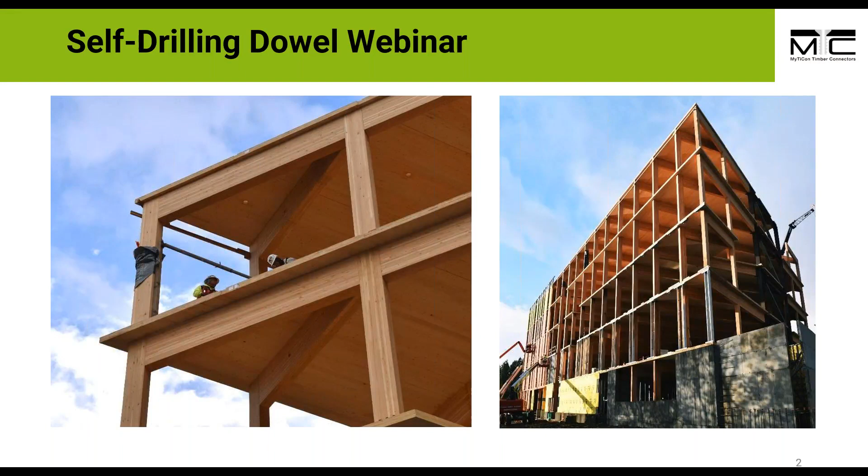Hi everyone, welcome to the Self-Drilling Dowel webinar. Self-tapping screws have revolutionized the mass timber world, enabling bigger buildings and more complex structures. However, one of the governing design parameters is still the fire rating of the structure, leading to the popularity of concealed connection systems. Wouldn't it be nice for designers working in mass timber to have access to a fastener engineered for internal knife plate connections? We think so, and that's what I'll present today.

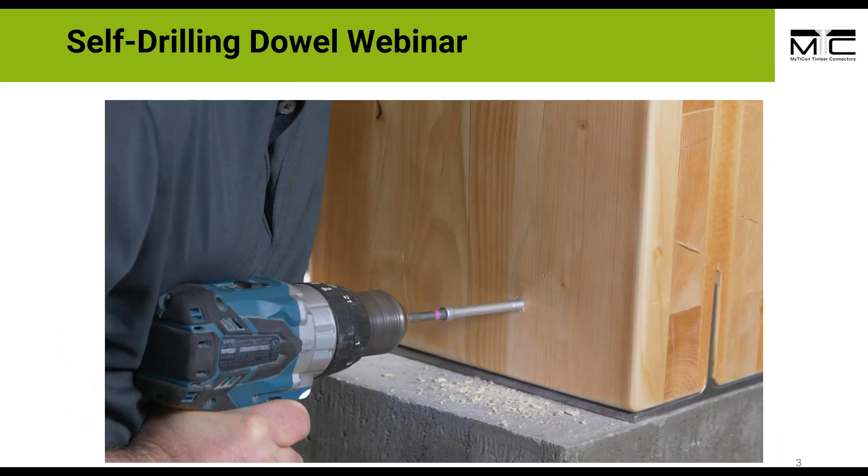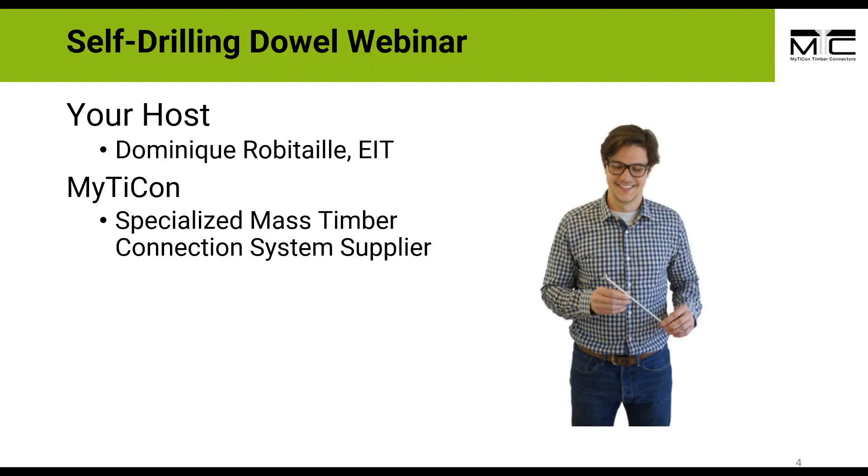Hi, my name is Dominique Robitaille. I will be your host today. I'm a technical support engineer at MyTiCon, a specialized mass timber connection system supplier. Today we'll go over three major questions: What is the self-drilling dowel? Why use it? And how to use it.

To answer our first question, we'll go over a simple product presentation. We'll go over the self-drilling tip, the continuous thread, the concealable head, and the hardened steel, and I'll explain why these features will help you design a connection that's easier to detail and to install.

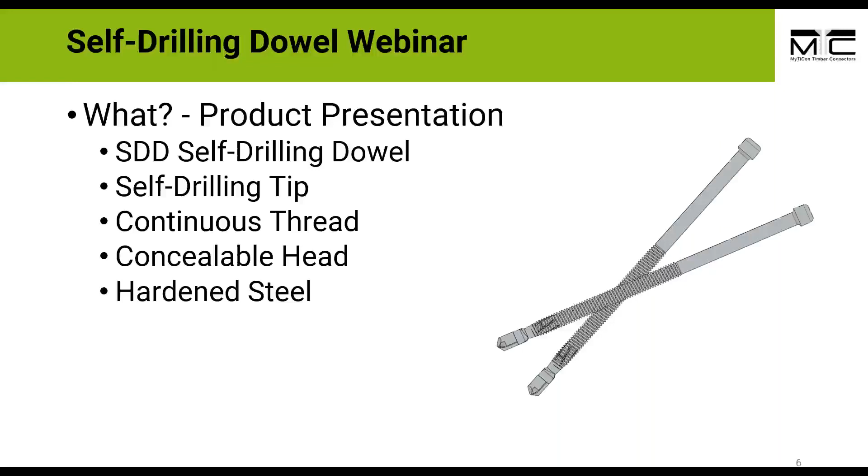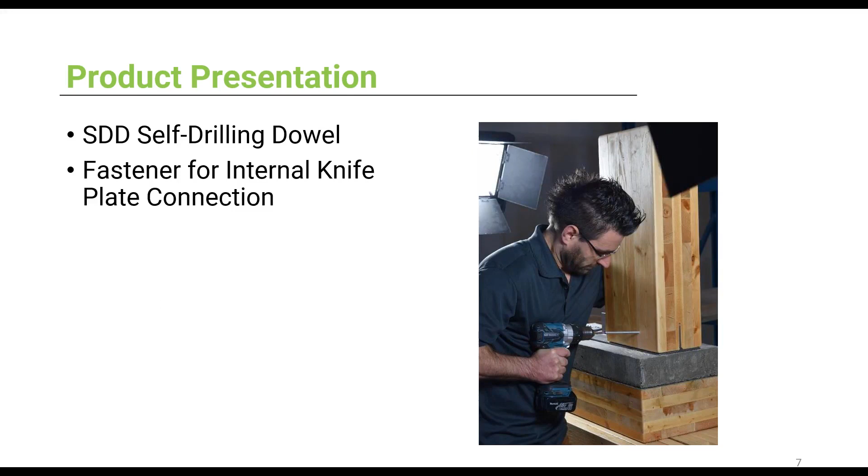What is the SDD? It's a self-drilling dowel designed to hold internal knife plate in mass timber connections that can easily be installed with a cordless drill. Here we have Max, my boss, installing the SDD for our installation video. This is mostly to show that we would never sell a product that we cannot install ourselves, and we cannot expect the contractor to install something we cannot. I'll show you the video a bit later.

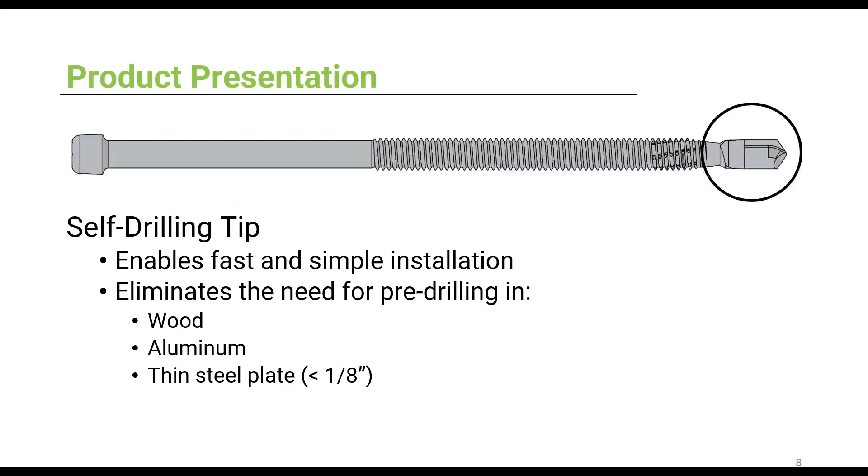Let's begin with our first feature, the self-drilling tip. It enables fast and simple installation and eliminates the need for pre-drilling in wood, aluminum, and thin steel plate. By thin steel plate we mean thinner than 1/8 of an inch.

Second feature, the continuous thread, which helps avoid slippage of the dowel. Once the dowel is installed, the thread maintains it in place and helps drive the dowel in. It also allows installation with a cordless drill because of the low installation torque.

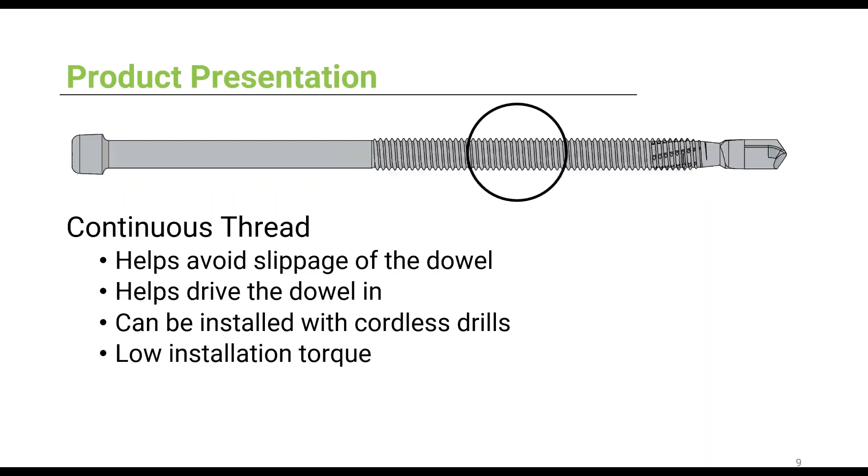Finally, we have the concealable head designed to be used with AW40 bits. One of the most important features is the hardened steel. The whole dowel is made of the same steel, which reduces the risk of the head falling off. The hardened steel gives the dowel high design strength, exhibiting stiff behavior, and we have a surface coating for corrosion protection on top.

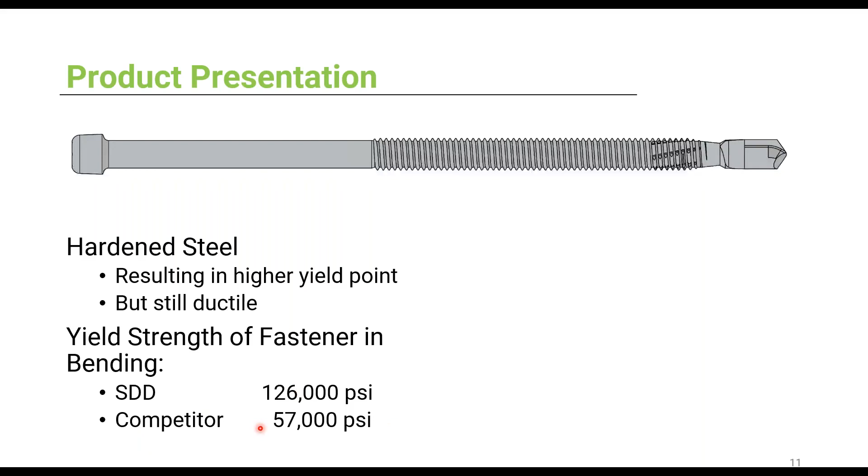We can compare the bending yield strength of the fastener to a similar product on the market, and we can see that the bending yield strength of the SDD is twice the strength of similar products. So to recap: what is the SDD? It's a fastener designed to hold internal knife plate in timber connections that can be installed with a cordless drill because of the self-drilling tip, the continuous thread, the concealable head, and it's made of hardened steel.

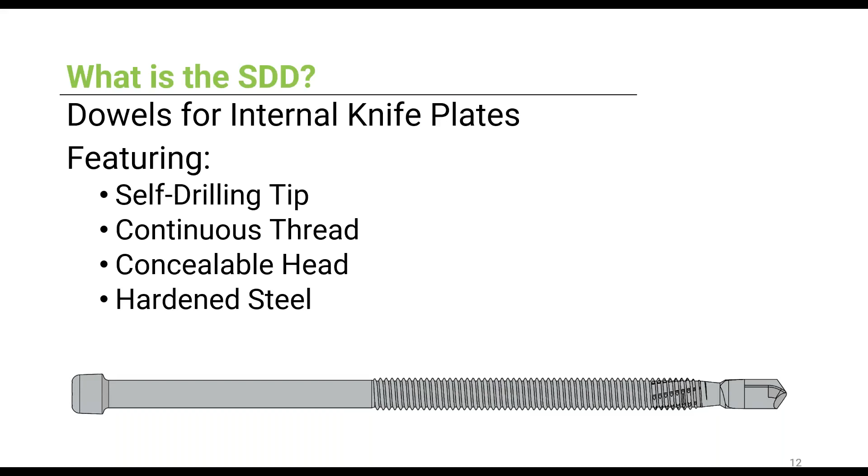Next question: why use this dowel, other than the high bending yield strength? Because they allow for simple installation of concealed connections, but also because they are adaptable, they are tested, and that's what we'll explore now in this section.

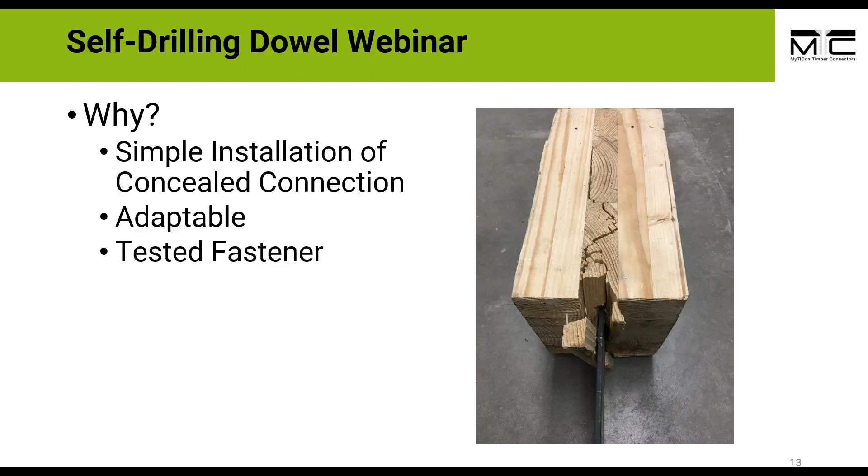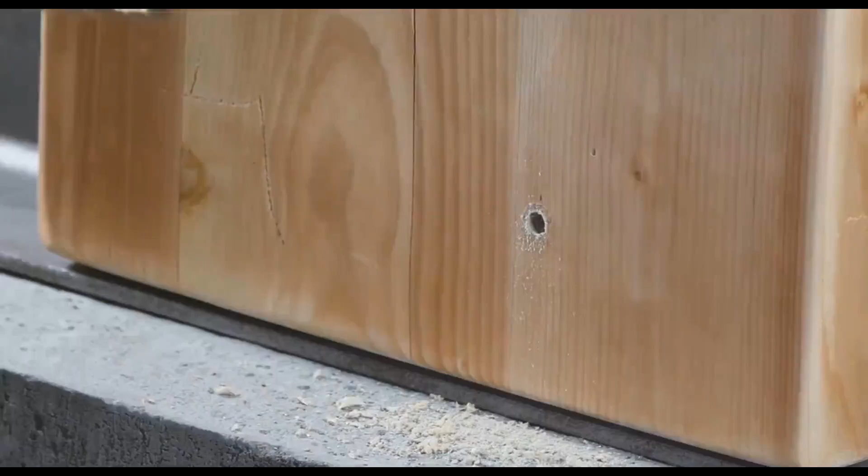To demonstrate the simplicity of the installation, I'll show you part of our brand new installation video. As you can see, we start by pre-drilling with a 1/4 inch drill bit, and we pre-drill all the way through to the steel plate, and then we can simply install the dowel in.

You'll see there's a bit of a bump once Max hits the steel plate, but the installation is still fluid and rapid. You can see the bump right here. But as you can see, it goes in pretty quickly still, even though we haven't pre-drilled all the way through to the other side of the CLT.

And if you want a fully concealed fire-rated connection, you add a wood plug to cover your dowels once they're fully countersunk. So we'll go into a bit more detail on how the features make for a simple installation.

So first, here we have the pre-drilling. The red part here represents the pre-drilling. The drill tip eases the entry, and then the thread helps the forward movement. Then the thread grips onto the steel plate and guides the dowel through it. Finally, the tip finishes the drilling, and the thread maintains the dowel in place.

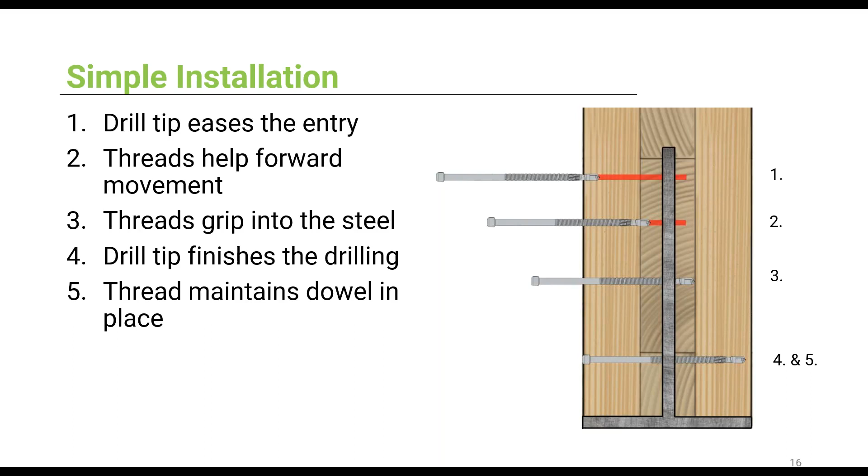So we can compare the simple installation of the SDD with a half-inch steel dowel. For a regular half-inch steel dowel, you'll need to use a hammer and a lot of on-site work, which leads to higher risk of splitting the wood. On the other hand, our SDD allows for more shrinkage and swelling of the wood because they can bend a bit more. They also allow for better stress distribution and better load dissipation.

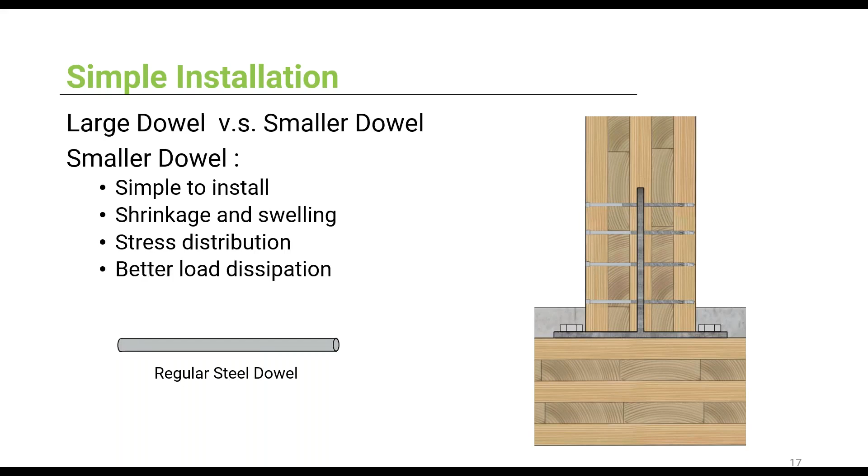As I mentioned earlier, if you want a fully concealed fire-rated connection, you can countersink your dowels and cover the hole with a wood plug.

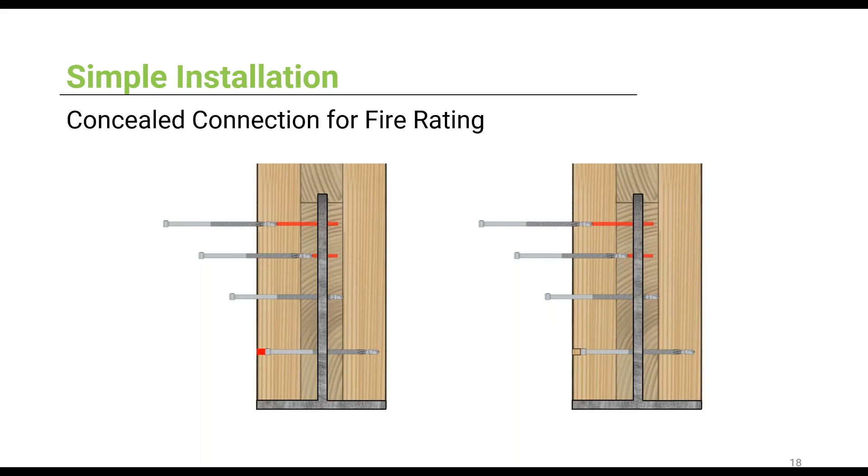So first tip for my tip section will answer the question: should you pre-drill on-site or not? Pre-drilling off-site can seem more efficient, but it may lead to more labor-intensive on-site work, as it can be hard to align the hole in your wood member with the ones on your steel plate.

So our suggestion is to use pilot holes, so you don't need to measure edge distance on your wood member on site. But once you're on site, you can use the pilot holes as a guide to drill into the steel plate and then install your dowels. So our solution to whether you should pre-drill on site or not is pilot holes.

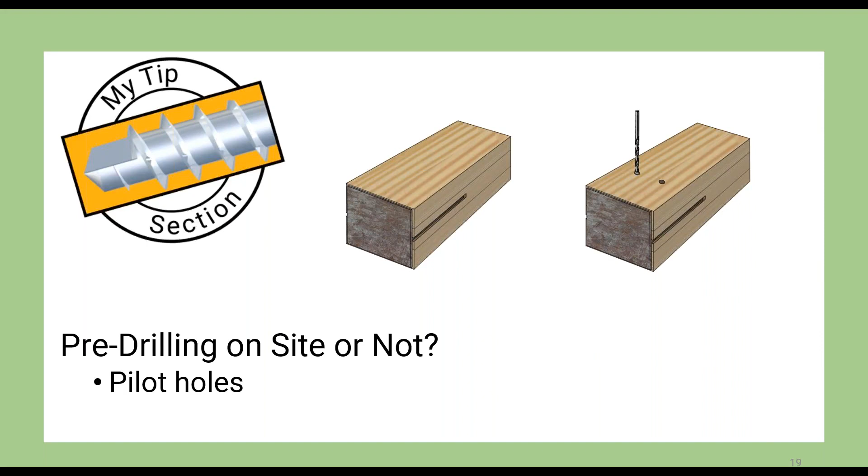In the following slide, I'll present visually appealing concealed connections. To do that, we'll go over the most common framing systems, and I'll show where the SDD could be used. We'll go over examples in platform framing, balloon framing, and post and beam framing.

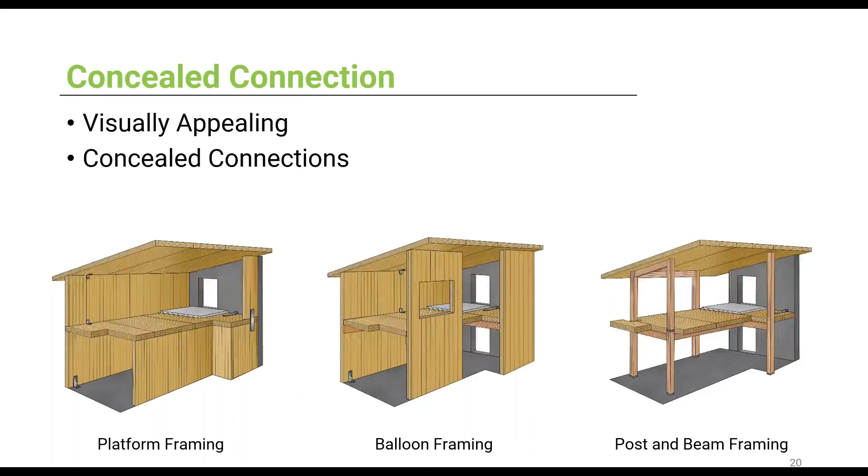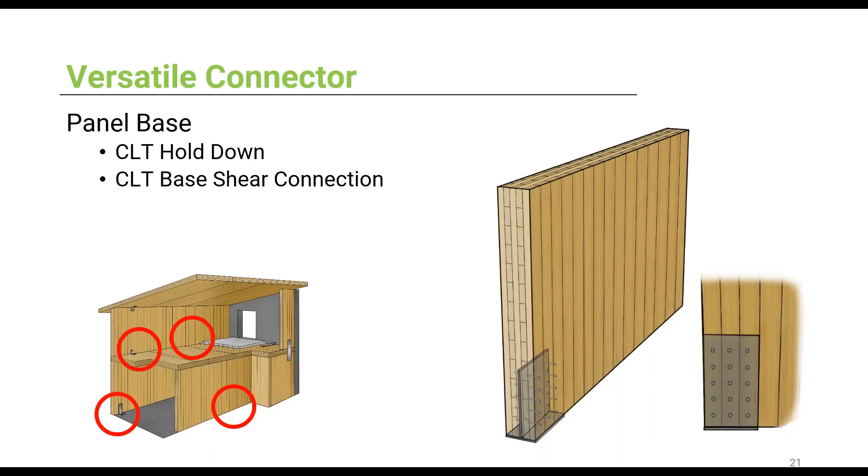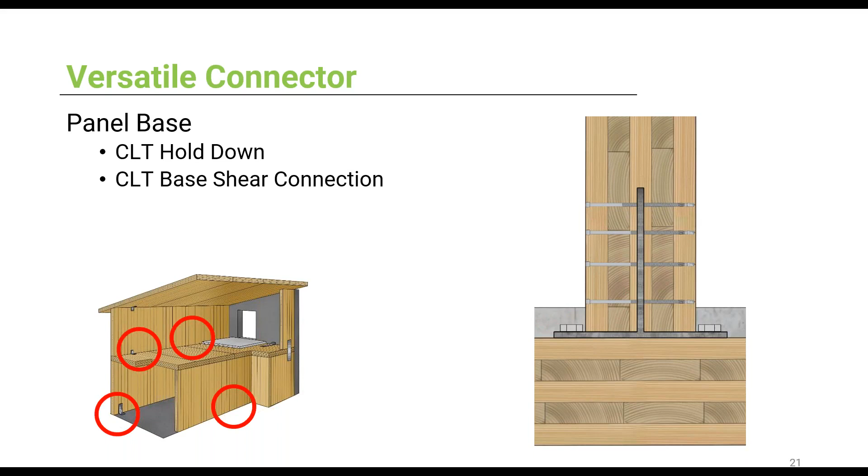So our first example looks at panel base connections, where we have CLT hold downs and CLT base shear connections. For the CLT hold down, we can replace the angle bracket with something like this, and we can replace the base shear here with something like this, where you can see the concrete topping conceals your steel plate completely. This could be done in platform framing or balloon framing.

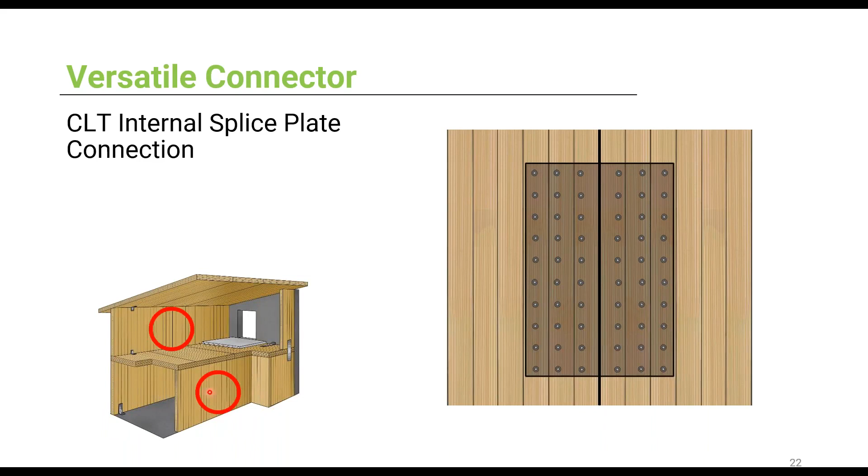For the second or third example, the SDD could be used in internal splice plate connections, again in platform framing and balloon framing. So you can have a completely concealed internal splice plate connection here.

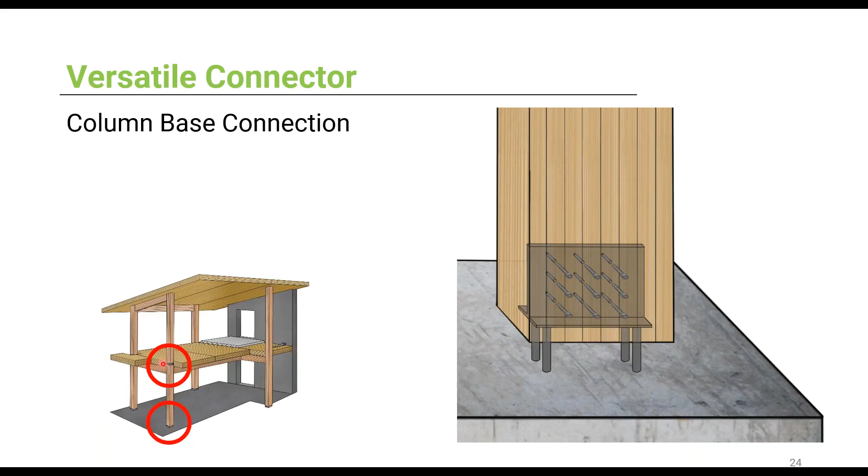Another option is knife plate hangers that could be used all over your structure for a post and beam framing system. And another example of why these fasteners are adaptable is moment connections.

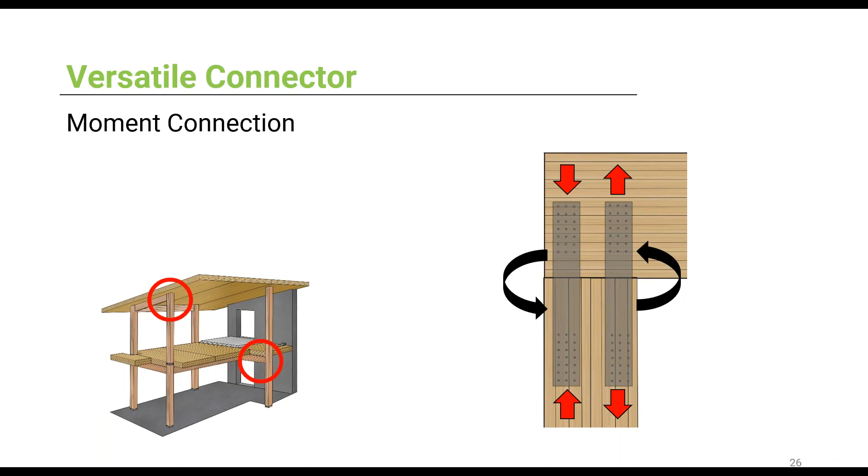On this type of connection, it's important to make sure that the dowels are installed symmetrically around the centroid of the connection, so the load is spread properly.

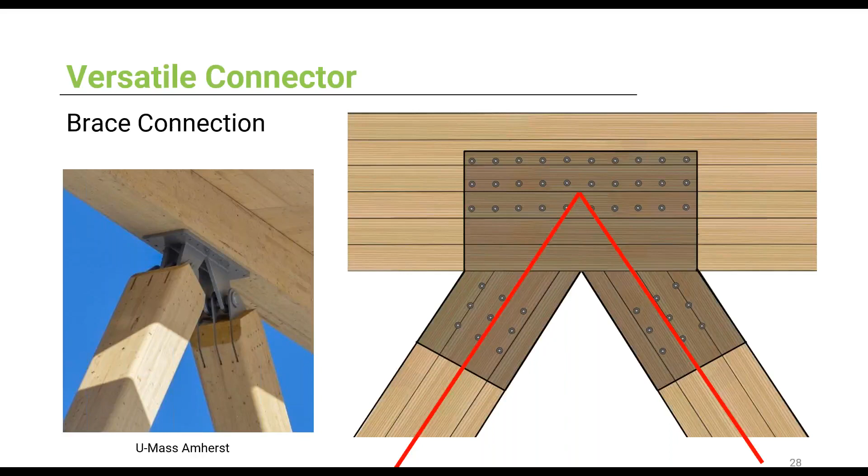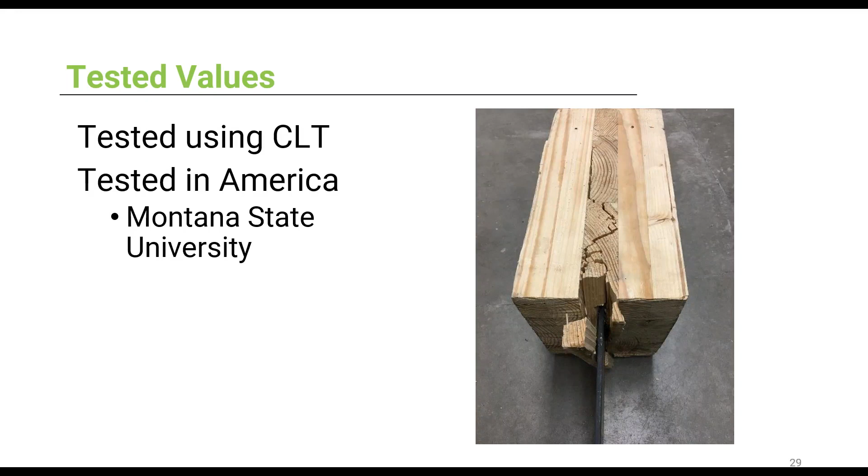Another reason to use these dowels is because they are tested. They were tested using CLT, and specifically tested in America at Montana State University.

I've previously talked about fire rating. To get the proper fire rating, you can use the same concept as for our beam hangers, which is to protect the steel with wood.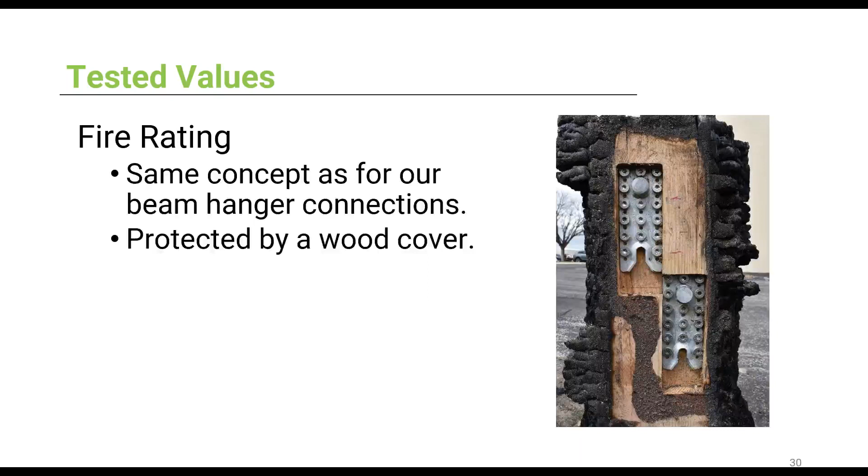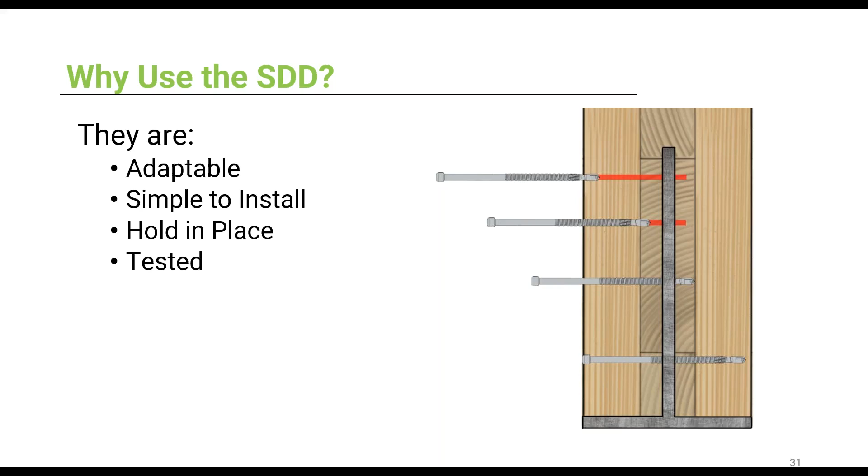So, conclusion: to have a fire-rated connection, you need to completely conceal your dowels and your steel plate. If you want to conceal your dowels, we suggest using wood plugs, like this example. To recap, why use these self-drilling dowels? Because they are adaptable, simple to install, they hold in place, and they are tested.

Final section: how to design with these dowels. We'll go over a few important details to remember, then the design guide, the geometry requirements, and the bending yield strength.

First important detail: to determine the depth of your plate, you need to talk with your wood material supplier to make sure you can route a long enough slot into your plate. On the left we have an example of a 23-inch blade, and a CLT panel on the right. But because of how the saw is designed, you can only get a 6-inch slot into your CLT, even with a 23-inch blade. That's something you need to discuss with your wood provider to ensure the right slot in your CLT panel.

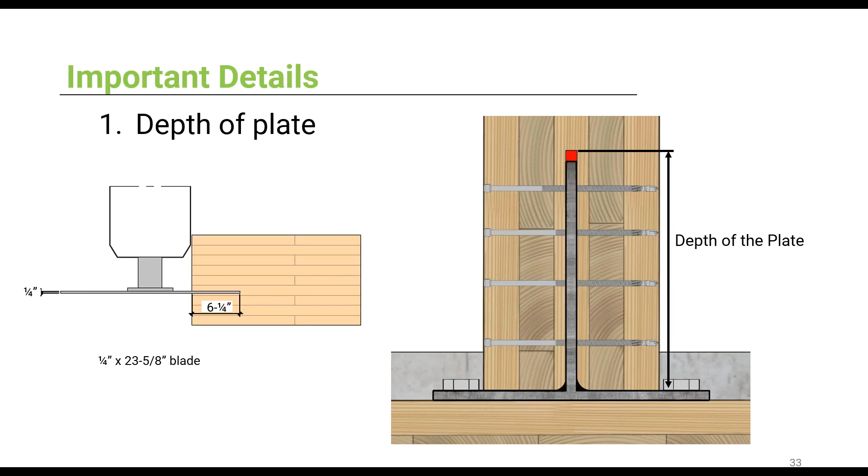Another important detail is to reserve extra space on top of your connection, because under compression, the knife blade may act like an axe on your wood member and simply split it in two -- something you definitely want to avoid. Make sure you keep half an inch here to account for the compression on your connection.

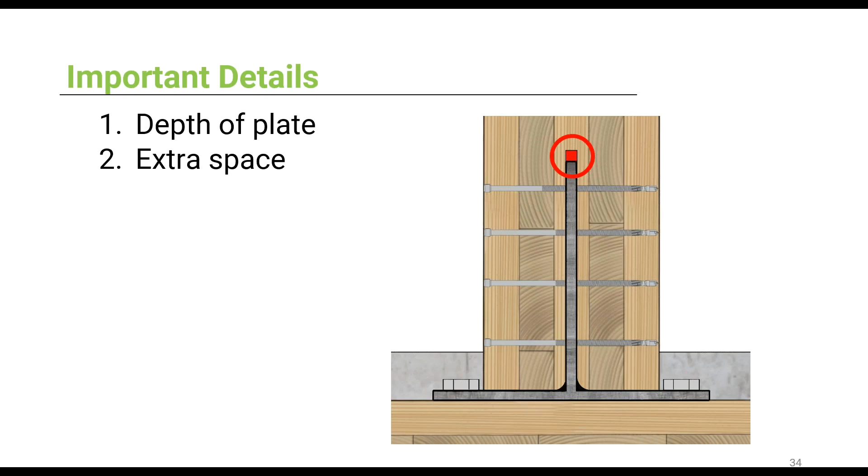Third important detail: check if your steel plate has rounded corners, like a hot-rolled T-section, or welded corners. In both cases, you need to bevel the corner of your wood member to make sure it fits perfectly on your steel plate.

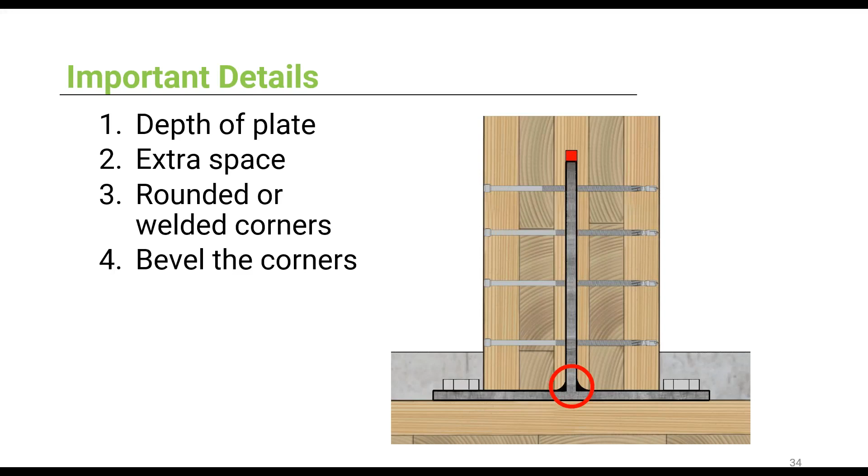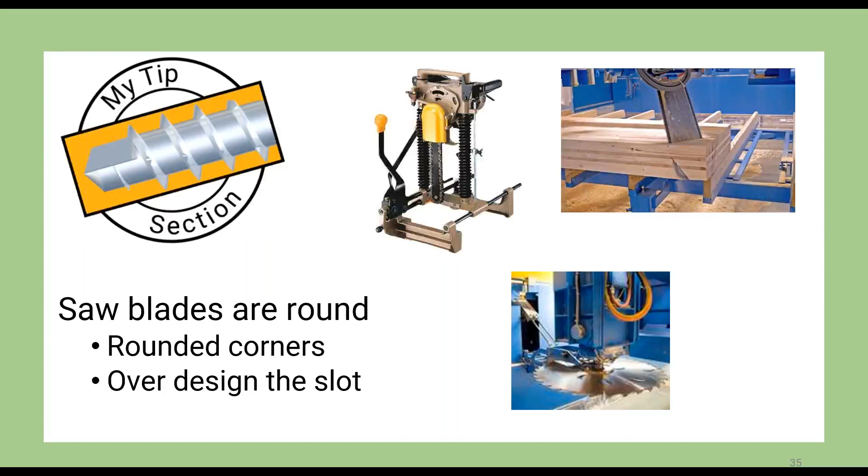Another detail to remember is that saw blades are round. This might sound funny, but it's a comment we often get from installers -- the steel plate has squared corners while the slot has rounded corners, so the plate doesn't fit. So either design the plate with rounded corners, like here, or over-design the slot to account for the curvature radius of your blade.

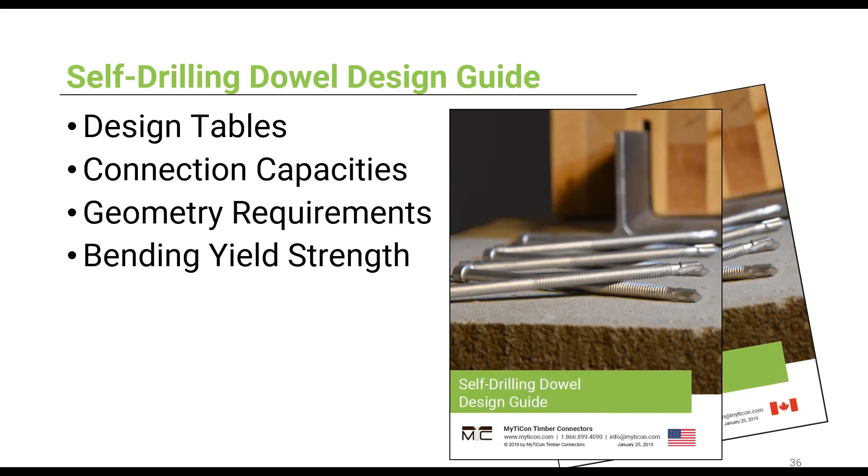We'll now go over the design guide, using the Canadian and American versions at the same time, with a simple column-base connection as an example.

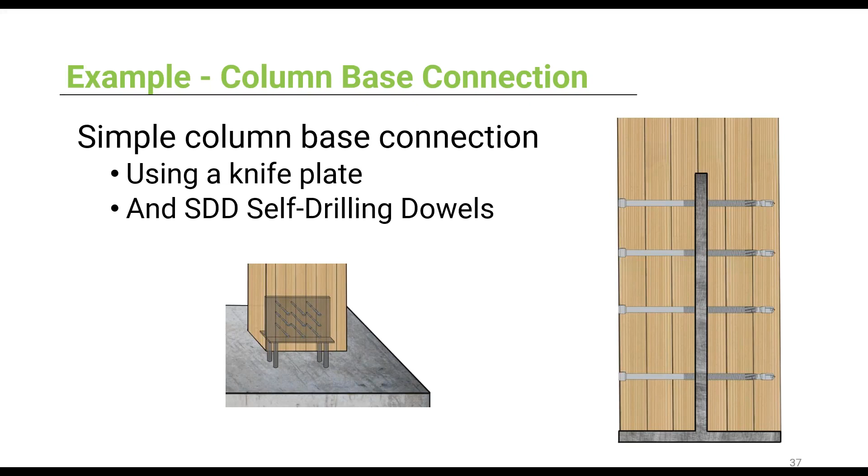The connection is going to use a single knife blade and 4 self-drilling dowels.

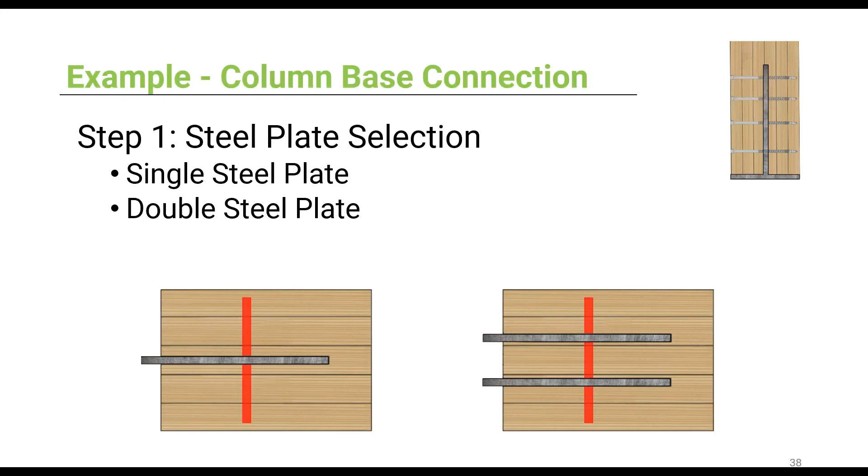First step: decide how many steel plates you should use. The choice depends on the thickness of your wood member -- with thicker members and heavier loads, use a double knife blade connection. In our guide we suggest a 1/4-inch steel plate, though aluminum plates could also be used. For our example, we'll select a single knife blade connection.

Step 2: select the length of the dowel you want to use, which also depends on panel thickness. We have 9 different lengths available, from 3 inches to 9 inches, all with the same diameter of 1/4 inch.

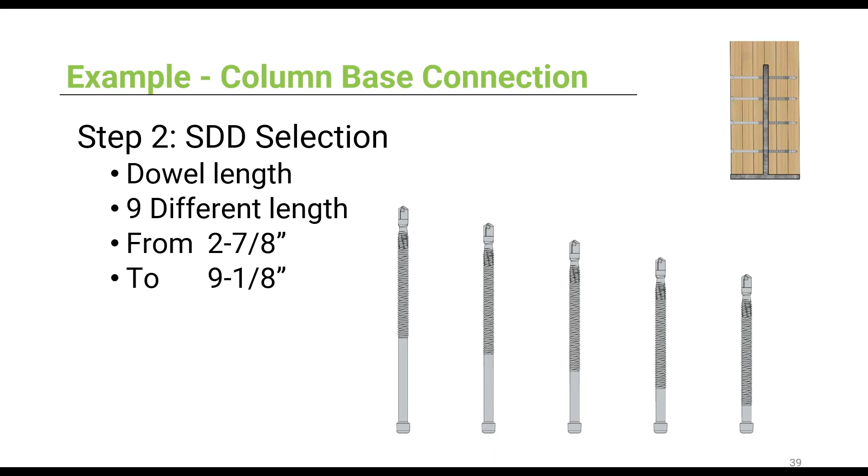So here we have the graphic of the design value of the dowel and the length of the dowel. Because of how the yield equations are calculated, the design value increases with the dowel length, and then it plateaus.

This example is for a single knife blade connection, but the concept is similar for a double knife blade connection. The second knife blade creates an additional shear plane, increasing the resistance of the dowel. This is why for bigger connections you should use a double steel plate connection, where the plateau is a lot higher in this graph.

So in our example, we decided to use a single knife blade. Let's choose a 5 1/4 inch dowel, which would be right before the plateau. That's what you always try to optimize.

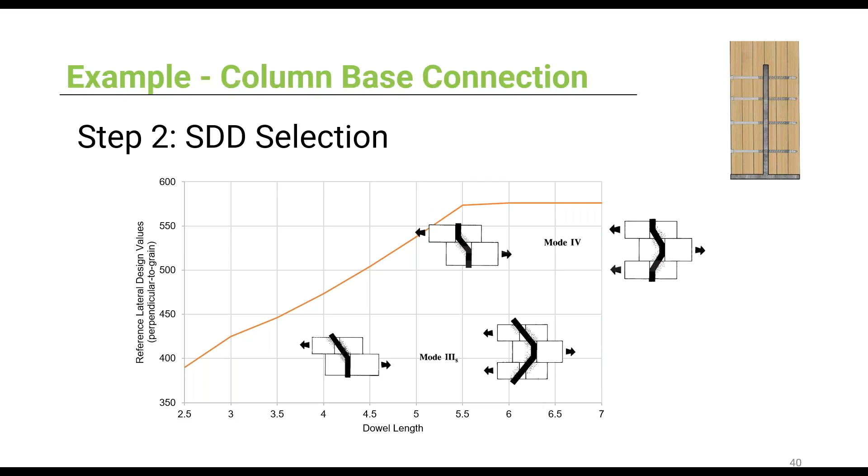Step 3, evaluating the design value. But before you do that, you need to make sure the embedment is checked. Before evaluating how strong your connection is, you need to make sure there's enough embedment on both sides of your steel plate, and in between as well.

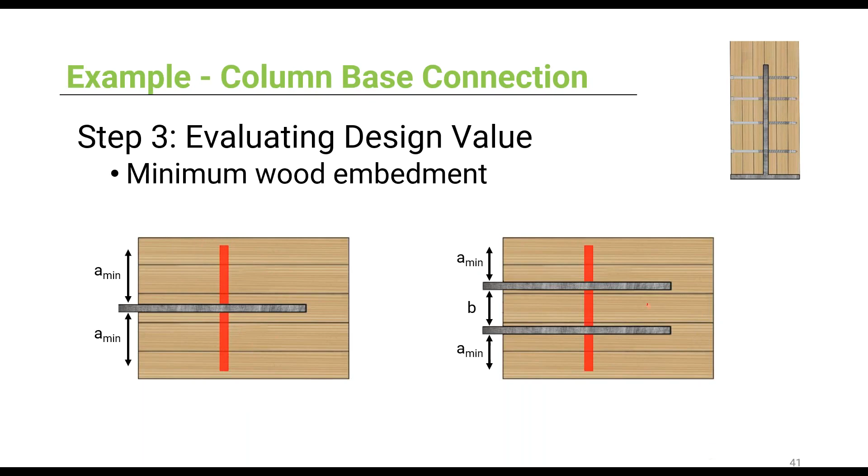This is shown in our design tables, which leads me to another tip: selecting the optimal spacing in a connection with 2 knife blades. To do that, you want to make sure that T1A is equal to T1B, so the spacing on the exterior of your connection is the same as the spacing in between your 2 knife blades.

The NDS doesn't provide clear guidance on that, especially on double knife blades, so we use guidance from the CSA, the Canadian version of the NDS.

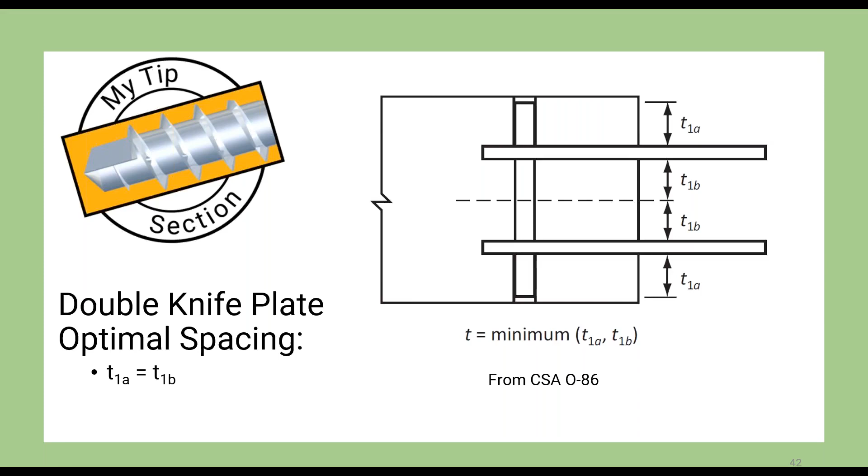Now let's assume that for our example, the embedment length is respected. Now we can use the design table to evaluate the design value of our dowels. We used a 5 1/4 inch dowel, so we have 3 values here.

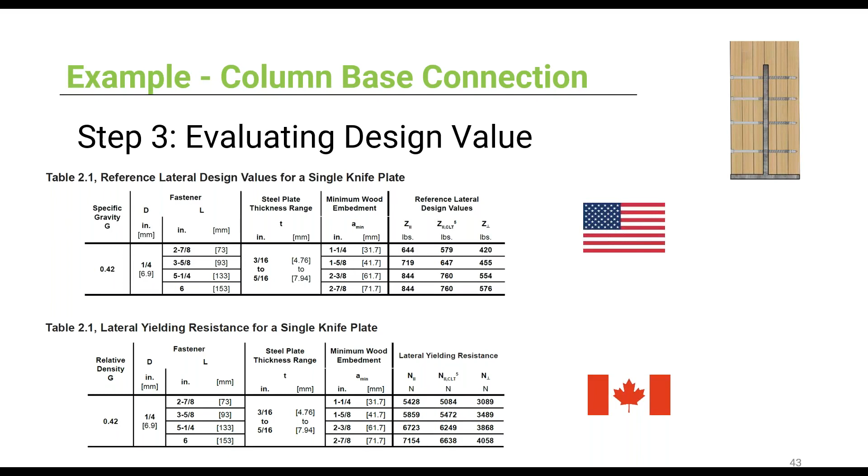These 3 values depend on the load direction at the shear plane, and we'll go into a bit more detail. First case is parallel to the grain loading. Then we have parallel to the grain loading in CLT. And third, we have perpendicular to the grain loading in CLT and in timber.

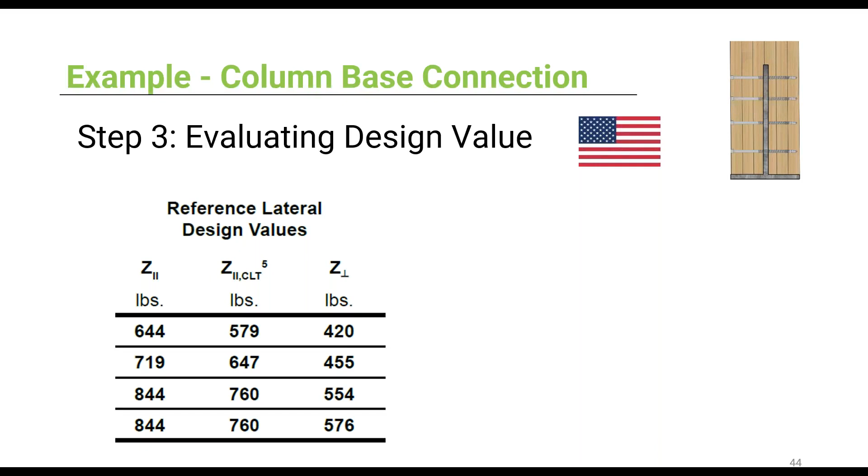With a connection in CLT with 2 knife plates, it may be difficult to determine how the load is applied. Here we have an example where there could be perpendicular to grain loading on one side of the steel plate and parallel to grain loading on the other side. If such a case occurs, we suggest using the most conservative value, so the perpendicular to grain loading, this one here.

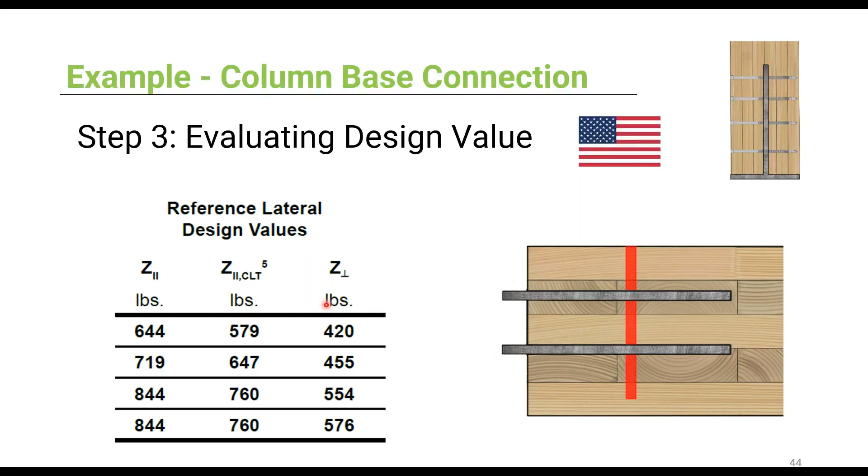Step 4, we need to adjust the design value. We have two adjustment factors. In the US, we have the NF factor and the C factor, and in Canada, we have the NF factor again and the K factor.

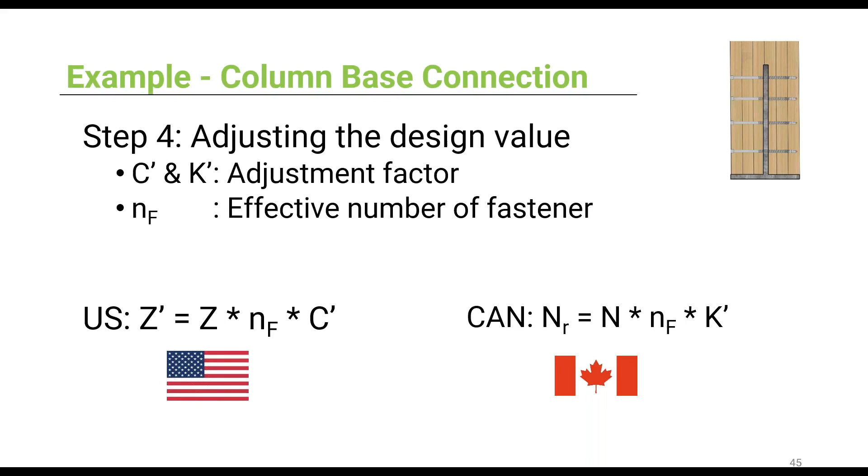The C and K adjustment factors are for service conditions, so dry or wet, the duration, and other factors. The NF factor is for the effective number of dowels needed. This accounts for the number of dowels, but also for the group effect.

So as I mentioned, NF is the number of effective fasteners acting in a connection together, and it depends on N, the total number of fasteners acting in the connection. In our example, we said we are using 4 dowels, so our effective number of dowels would be 3.6, using the 0.9 reduction factor we have here.

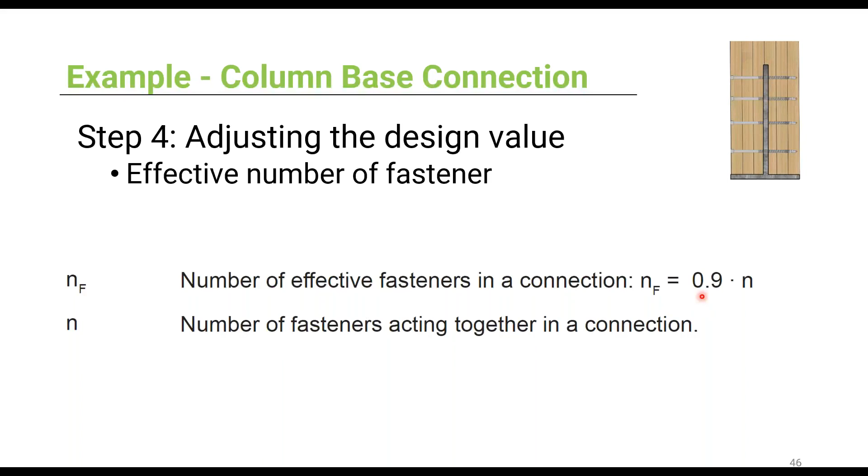Finally, step 5, we need to make sure that the geometry requirements are respected. The design guide provides values for timber, glulam, and CLT.

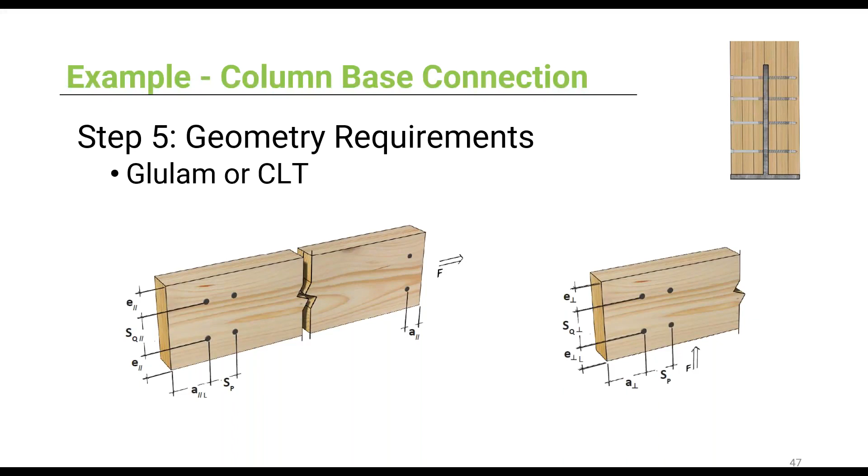If you want to design a connection that's outside the scope of our design guide, with an aluminum plate for example, or a thicker plate, or really thin plates, we provide the strength in shear and the bending yield strength of the fastener, so you can use these values for your own design.

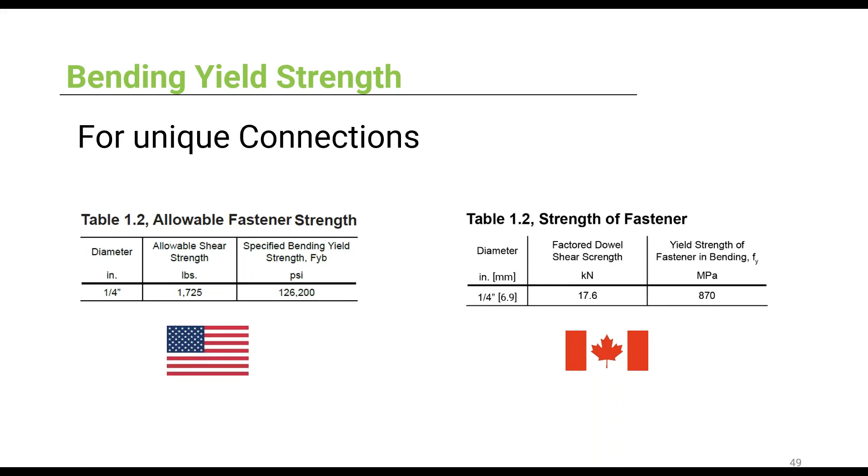To recap this section: how to design with the SDD is by using the self-drilling dowel design guide, and by making sure not to forget the important detail mentioned earlier.

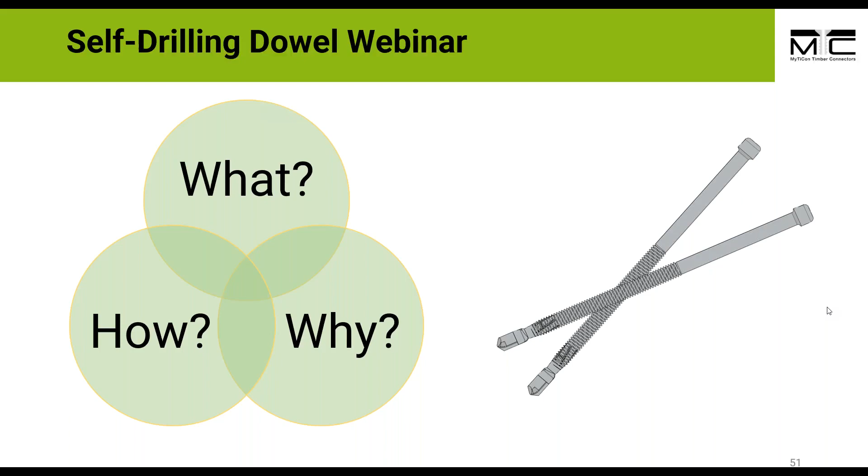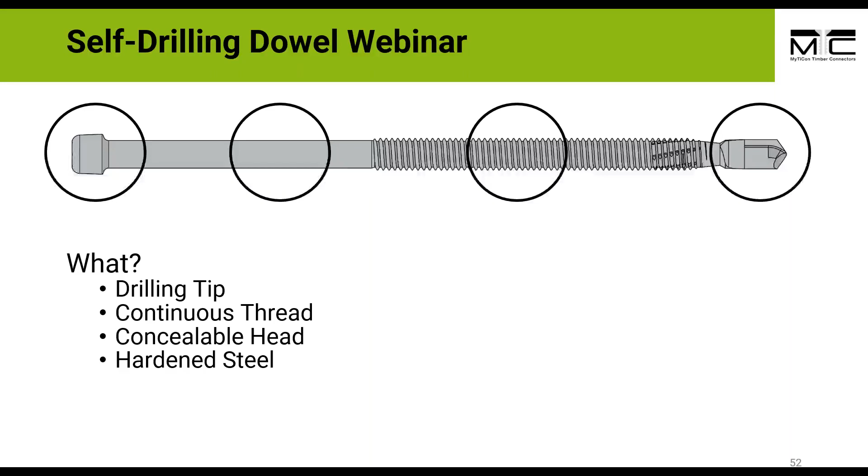First question: what is the SDD, Self-Drilling Dowel? It's a fastener designed to hold internal knife plates in timber connections, featuring a self-drilling tip, a continuous thread, a concealable head, and hardened steel. Remember the really high bending yield strength.

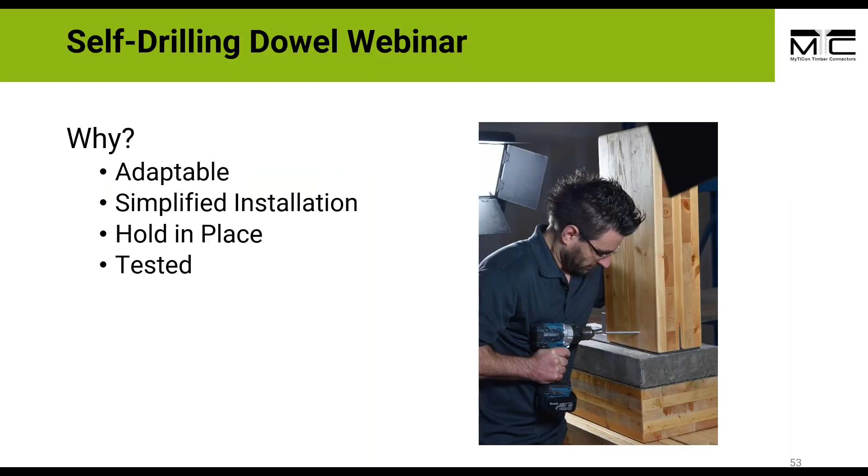Question 2: why use these self-drilling dowels? Because they're adaptable, simple to install, they hold in place, and they are tested.

Question 3: how to design with the SDD? By using our self-drilling dowel design guide that we provide for Canada and for the US, and by making sure not to forget the important details mentioned in this presentation.